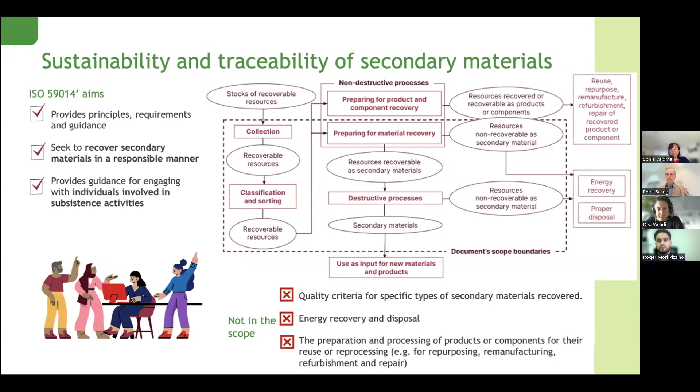So these steps for the preparation and processing of products for reuse or reprocessing are in a step before, or when recoverable resources could be sorted out in a way that they could go to a higher part in the hierarchy and being reused. So this is a simplified way to describe the activities and processes within the scope of the standard.

Two important elements to highlight how ambitious this standard is: the intention of this standard, aiming to change mindsets. And you will see, starting with standard 59004, with the definitions and framework, and then with the other circular economy standards, we agreed to avoid the term waste, because in our mindsets, this has a connotation of something that cannot be used anymore, that doesn't have value.

So we said we will replace this term with recoverable resource. And you will see along the document in the 59014, perhaps only twice we use the term waste, in order to still acknowledge the correspondence, because you see many statistics that you cannot delete, and there we will have the term waste for numbers, for figures, for some definitions. But this was one approach that we used.

And the other aspect that is also very relevant to highlight is the acknowledgement of these people, individuals, that work under subsistence activities, earning the minimum to subsist, to survive. These are the majority in value chains that handle waste management, especially in vulnerable economies, in emerging economies, where about 80% — of course this will depend on the recoverable resource stream — 80% of these individuals are engaged in subsistence activities. So there needs to be a way to acknowledge and to include, to improve their work styles, their working conditions.

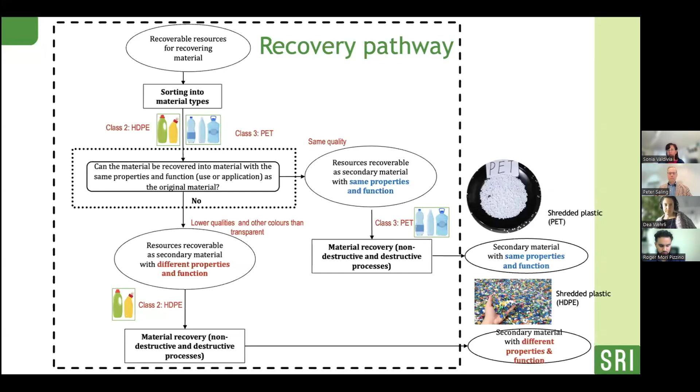And if you are used to using the language of hierarchies in the circular economy, then you would say this is the higher hierarchy in this process. If we don't achieve that, that would mean the materials recovered do not have the same properties and functions, so they are of lower quality, and this would be the next option. This is about the recovery pathway, and that is required to be presented, to be thought through when implementing ISO 59014. So with this, I just conclude with the pilots that we are conducting as part of the program that supported the development of this standard.

There are 5 pilots in a number of countries. One is E[co]work, which you will see today presenting the progress. The other is BEM Recycling in Mauritius. E[co]work is in India, BEM Recycling is in Mauritius, a small island in Africa.

I didn't even find the dot where I could put it, but this is somewhere there besides Africa, in the southern part of Africa. Then you have the value chain of a company, Fairphone, that starts in Ghana and goes to the Netherlands. The other pilot is in Peru, CICLO, working on recycled granulates for the building sector.

Roger will explain about this today. With this, we have completed our process and can only thank the participants that worked on the standard. Some of them are present today, you've seen the list. And with this, I would like to welcome the first presenter.

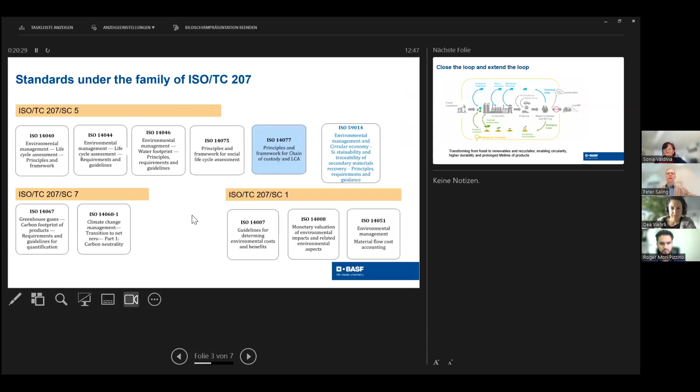In my subcommittee, subcommittee 5, which I chair, we are focusing on the most relevant standards for LCA, 14040 and 14044, but we also have standards on water footprint. Sonia also mentioned ISO 14075, which was published last year. It's principles and framework for social life cycle assessment, which will also be important at the secondary materials level to cover social impacts.

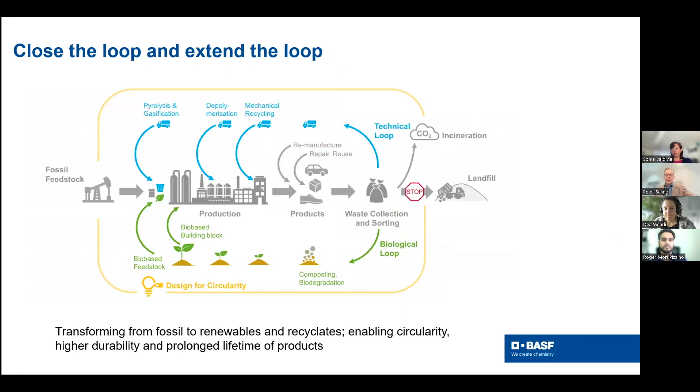Circular economy has a lot of dimensions, a lot of opportunities, a lot of ideas that can be implemented. So I'll just give you an overview on closing the loop and extending the loop. All these things might be covered also with ISO 59014.

You see different technical elements like pyrolysis and gasification of waste, of packaging waste for instance, or depolymerization. Mechanical recycling can be an element in there too, looping materials. That can be done also on bio-based materials, using bio-based feedstocks, using bio-based building blocks coming from recycled processes or secondary materials, so they can feed into this biological loop. So we have a technical loop and a biological loop.

At the end, we want to avoid landfill. We want to reuse the materials. We want to use all the resources in an efficient way to reduce fossil feedstock use, which goes hand in hand with the reduction of carbon dioxide emissions, but also the reduction of other impacts.

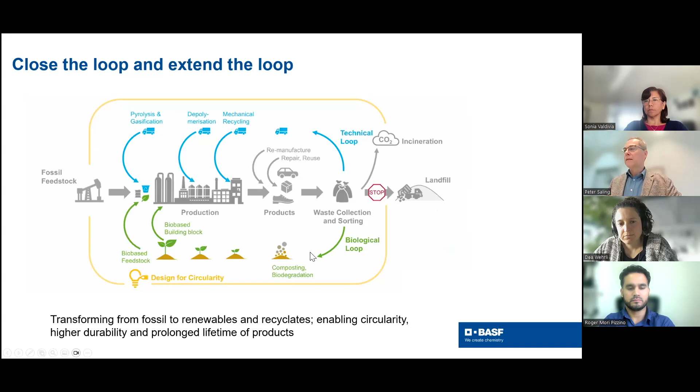You have many opportunities there on circular feedstocks. The idea is to increase the volume of renewable and recycled feedstocks from sustainable sources. That's important, how to find it out. Therefore you need a metric, you need an assessment, and you also need ISO standards to harmonize that in industries and in other countries.

At the end, because it's often an international process, you can clearly show where the benefits are if you use secondary materials. That's on circular feedstocks, but you can also implement new material cycles.

Designing materials for circularity, developing solutions that improve or enable recycling, enable higher durability and prolonged lifetime. There are a lot of opportunities that can be used there. And that can be linked also with new business models, because if you do something technically, you also have to market it, you have to sell it.

New markets might be interesting, but also creating smart solutions and offering new services, which allow decoupling of growth from resource consumption. So those are some of the key elements here you should consider.

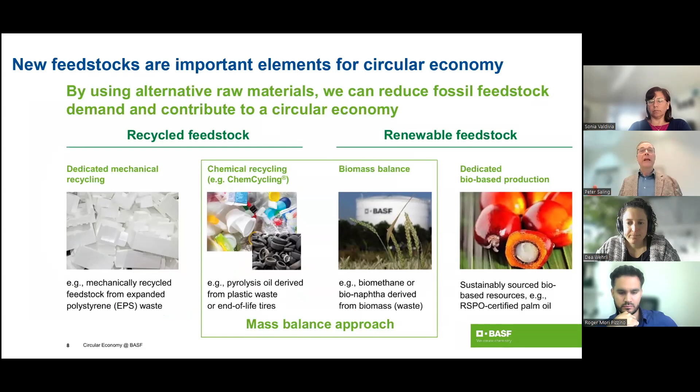New feedstocks, I'll just give you some ideas on that. For sure it's not a complete list, but it might give you some ideas how to use feedstocks, and also how to apply the ISO standards on that to show where the benefits of these materials are, and whether they really make sense.

Also supporting decision-making in your companies, but also probably in policy making, and together with customers and final consumers, that might be helpful so that you show what you have done. You have a measurement system, a harmonized one based on ISO standards, and then you have results you can present, showing that your activities make sense, improving sustainability and closing many loops while following many requirements of the circular economy.

So you can talk about recycled feedstocks, probably from mechanically recycled feedstocks. Polystyrene is an example here. It's used in a lot of variations, and you have a lot of opportunities to recycle these materials if you can accurately collect the material, and then accurately recycle it, and you can show with a metric that you have done something meaningful.

Chemical recycling is more from our industry, one thing we're focusing on, because often the materials don't have the quality high enough for mechanical recycling. So we adapted a process after the mechanical recycling - the leftovers from mechanical recycling can be treated again, and you can do chemical recycling with that.

You can reintroduce this so-called pyrolysis oil that comes out, and feed it back into industrial sites, and make new compounds out of it. Often they have virgin material quality, so that's a benefit of this - you don't have to change systems, you don't have to change material lists and things like that. So it's an identical product that you can produce out of these recycled wastes.

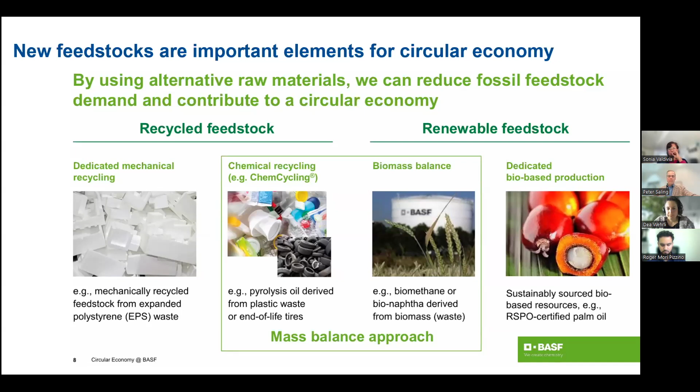To sum that up, what we can say is circular economy means decoupling growth from resource consumption. Companies are more and more driving circular economy by making the most of the limited resources of our planet. Industry should keep materials in use for as long as possible, minimizing waste and creating value with renewable resources. ISO standards support companies in achieving their circular economy goals, and harmonized assessment approaches enable societies to understand the activities of industries and support purchasing decisions for a more sustainable future.

If you want to do this type of assessment, life cycle assessments for instance, which is a common tool that can follow ISO 14040 and 14044, there is today more and more data available, often freely available in open source databases or provided by associations. The EU Commission will also provide a set of data in the near future. So more and more, if people see there's a need for that, more freely available data will be there supporting your life cycle assessment.

But with primary information, you can also create your own data sets and use them in your own life cycle assessments and decision-making processes. So that was a short overview from my side.

Good afternoon to everyone, good morning for me because I am from Peru. I am Roger Mori, CEO of CICLO, a company that produces eco-materials from construction and demolition waste recycling. Many thanks to the World Resources Forum for the invitation. I will give you an overview of our experience implementing ISO 59014. From November of last year until January of this year, we had the support of the World Resources Forum for the implementation of the standard in our company, the results of which I will present below.

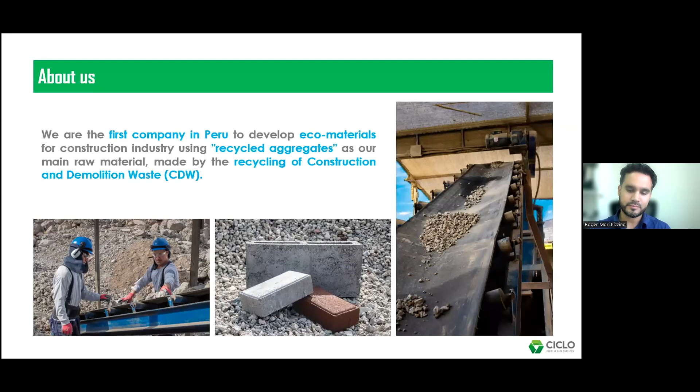I want to start by telling you who we are. CICLO is a company born with the purpose of reducing the environmental impact of companies that generate construction waste and consume construction materials. CICLO was founded in 2015 in Lima, Peru, but started operations in 2020. As you know, the construction industry generates a great negative impact on the environment, and for that reason we created CICLO. We inspired the name CICLO from the circular economy.

Our solution is based on offering two value propositions to the market. Companies pay us to manage their waste. Then we take this waste to our plant and turn it into new eco-materials that we finally sell in the same construction market.

So I will summarize my presentation by showing only the three main requirements of the standard: the operational requirement, the organizational requirement, and the last requirement. To evaluate the operational, organizational, and traceability requirements, we use a matrix called the feasibility questionnaire. First, we have the operational requirement, where we obtained a compliance of 54%.

The evaluation of this requirement allowed us to develop some documents that we did not have, such as an attribute list of the construction and demolition waste that arrives at our plant. The analysis of the collection requirement provided us an opportunity for improvement, so we are looking at how to improve our operation in our waste collection system. In general, we found a lot of opportunities for improvement in this implementation.

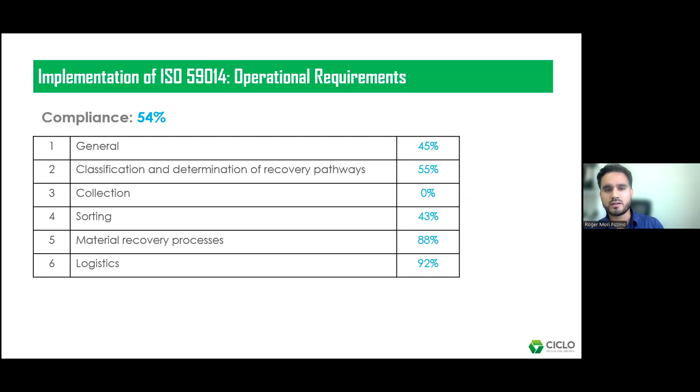On the other hand, we did not obtain a score in the responsibility towards individuals engaged in subsistence activities requirement, which means another opportunity for improvement for our organization. This indicator will help us to implement social support programs for people involved in our value chain, such as recyclers.

The traceability requirement is a total improvement opportunity. This was the importance of this implementation. Our organization has not yet implemented processes to ensure the traceability of waste.

This is due to several reasons. Firstly, we need to work in coordination with stakeholders, something that could only happen with law and regulation enforceable by the state. On the other hand, compared to other types of waste, it is very difficult to keep an exact traceability on construction waste.

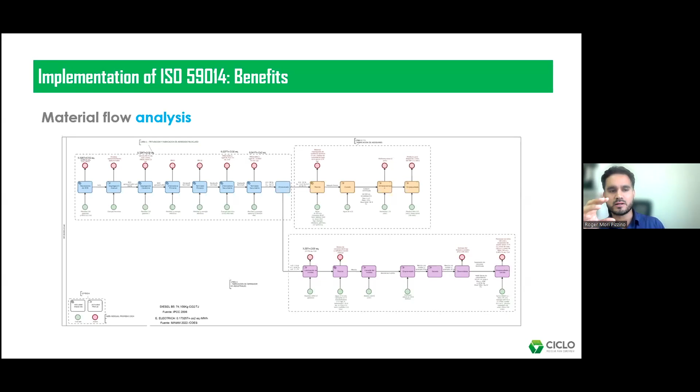For example, we now have a material flow analysis where we measure and quantify all inputs and outputs of energy and materials in our management and recycling process.

Another important document we have developed in our implementation of the standard is the list of attributes for recycled aggregates, because recycled aggregates is the product that we finally have in the recycling process of construction and demolition waste.

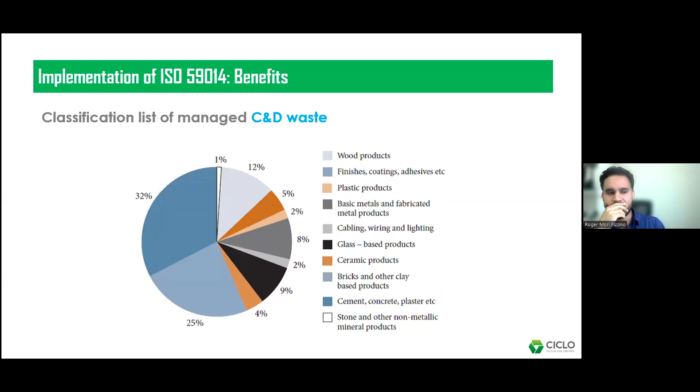And the other important document for us was the classification document, which is very important to strengthen the participation. This document is very important to manage the construction and demolition waste that finally is in our plant.

I want to finish this general overview talking about the code of ethics for the value chain that we were implementing in this implementation of the standard. This document is very important to strengthen the participation of recyclers in our value chain, which will allow us to have a greater efficiency in our material recovery process and greater social impact on the community.

Because we are working now with the Recycling Association for the improvement of the secondary recovery materials.

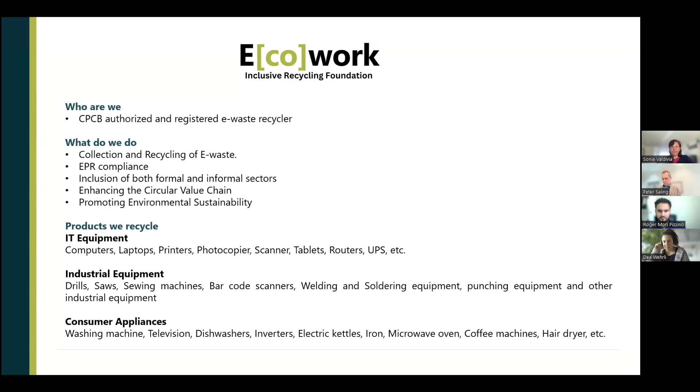Thank you, Sonia, and thank you very much for the invitation. Hello, everyone. I'm Dea Wehrli. I'm from Switzerland, but I'm here to represent E[co]work, which is an e-waste facility in India.

So we are based in Delhi, close to Delhi, and we have a facility of the size of approximately 20,000 square feet. And we are an officially registered, authorized e-waste recycler in India.

What we do is we collect and recycle electronic waste up to the level of dismantling it. Sometimes we aim to also have a shredder, but mostly it's really just dismantling and then forward it to formal registered downstream players. We are EPR, extended producer responsibility compliance.

Our goal or vision why we started this in the beginning was very much on finding a way how we can include and build a bridge between formal and informal players. So we want to close circular value chains, material change, and promote environmental sustainability.

We have a focus on products such as IT equipment like computers, laptops, printers, etc., but also include industrial equipment and we provide for consumer appliances also, like washing machines, televisions, dishwashers, etc.

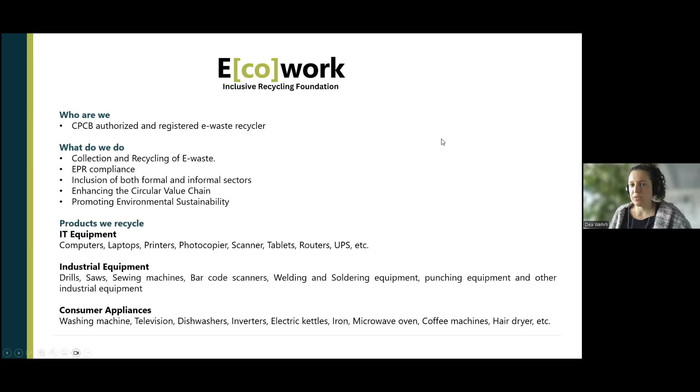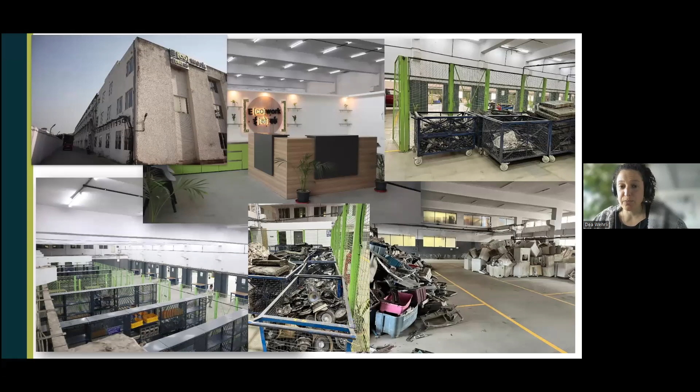And then some small workshops in case, let's say you're an informal micro entrepreneur and you want to dismantle your e-waste, you can also come to our facility and you can just rent a space. So we also have this kind of inclusion opportunity to work with informal micro entrepreneurs to really be that bridge-building entity.

What we do also with the informal sector specifically is provide capacity and educational awareness training sessions and workshops, not only on technical aspects about hazardous substances found in e-waste, but also on more administrative things such as compliance and EPR requirements. We try to support them wherever there is a need we can see that's also valuable for the business and their understanding.

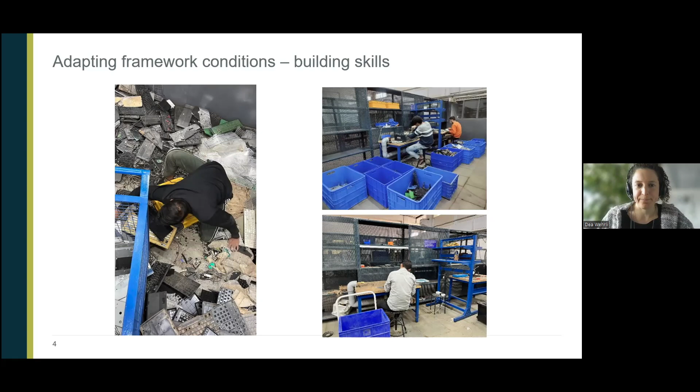So for you to understand, we have the facility, and this is now trying to align with the ISO requirements when we went through that implementation of the ISO standard.

At the facility, we have criteria for what kind of materials we recover. For example, it has to have a certain economic value, there needs to be a market and demand, we need to be able to treat it safely and procure it in a legally compliant way, and there should not be child labor involved.

We then also apply an HS code and an item code for what kind of material and type of electronic waste it is, and so on.

Then there's a first classification and sorting that takes place, based basically on attributes such as: can the item be sold as such for reuse? Is it maybe an item that arrived but we don't actually accept? Or is it going for material recovery? Sometimes you have an incoming waste stream that is completely mixed, sometimes you have only specific e-waste products, and according to that, initial sorting takes place.

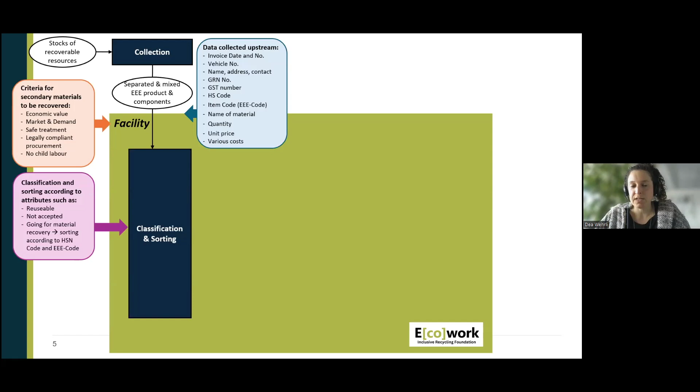Following that, whatever is good for reuse, we don't have a systematic approach in place yet, but it's basically based on optical tests, looking at it and understanding whether there's potential for reuse. Then this is sold further either for preparation by other organizations focusing on reuse, or for direct reuse.

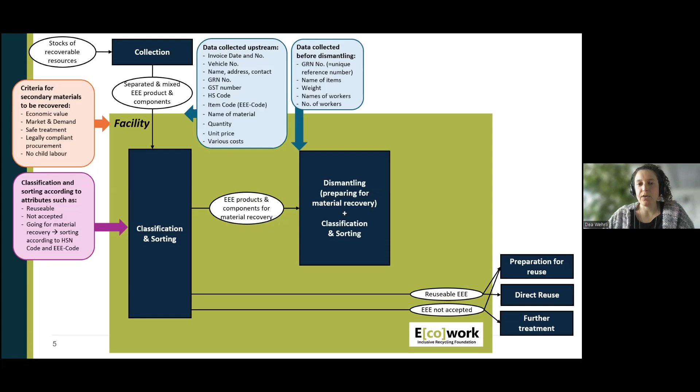A large part of the material, however, goes to dismantling, and that's our main focus of activities. Before we start the dismantling activities, since sometimes the material is also stored at the facility for a while, we collect the weight of the material going to be dismantled, the people working on it, and the unique reference numbers applied to it, which are also registered.

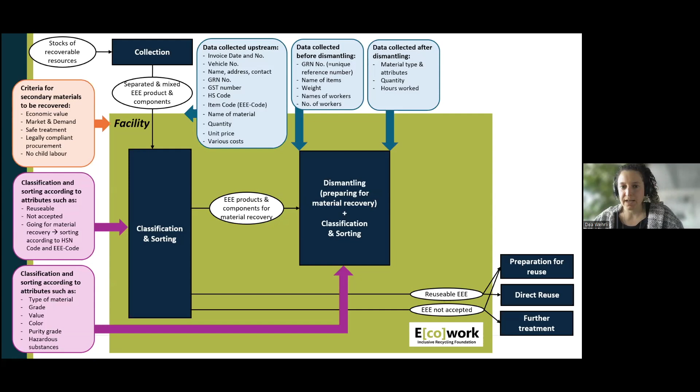Then the material is dismantled, and you end up with different materials. That is again classified and sorted according to different attributes, such as what type of material you have - copper, iron, plastics - sometimes the color of the plastics, the value, different grades, etc. After the dismantling, all this information is registered: how much copper do we have, how much iron have we received from that dismantling activity. This is done on a daily basis.

So then you have a lot of different fractions, and these go either to material recovery, hazardous treatment, or preparation for reuse, depending on the types of fractions. This is just to give you an overview of the material flow in the facility, and nailing it down for the ISO pilot really helped us understand the flow, and where exactly we collect which data, and where we have gaps in data collection and ensuring traceability.

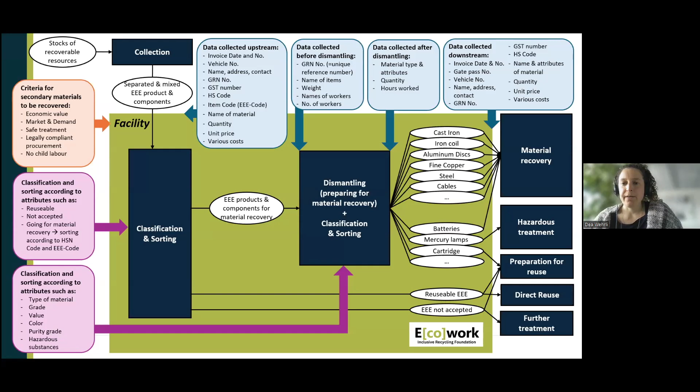I forgot this one. The last step is, of course, when the material leaves the facility, we register where it goes, the name and contacts. Again, for every fraction there is a specific code to ensure traceability.

Overall, by applying ISO 59014, we have a lot of benefits in showcasing to our customers that we are a hassle-free and fully compliant process, or at least showcase how far we are in compliance with ISO, that we are working and putting a lot of effort into having a traceable value chain, and creating data that can be used to improve the overall material cycles. It also helps in ESG reporting and understanding the engagement we have, or this focus on micro entrepreneurs that is really unique, and that enables us to highlight this social focus we aim to create and the impact we are aiming for.

Of course, there are a lot of challenges also regarding ISO. For example, applying all the standards and following these requirements is usually very resource and time intensive. In a competitive market setup, time is also money, so you always have to prioritize, and this is challenging, especially for a small and young startup like E[co]work. When we talk about traceability and the value chain, it's sometimes difficult to get the partners aligned and ready to apply, or sign, a code of conduct. For us, that's where we see a bit of the limitations, but also a very interesting approach on how we can improve and enhance the overall system.